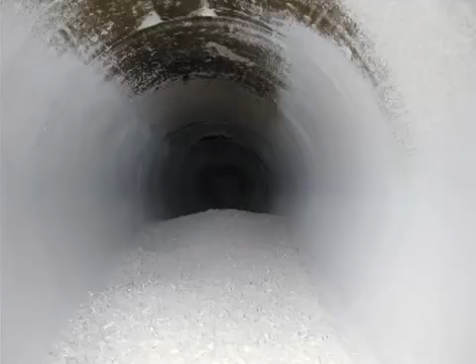Combustible dust fires and explosions continue to occur frequently, fueled by accumulations of combustible dust, which can gather over years in hidden places or in plain sight.

No company wants to see its facility blown up and destroyed and its employees killed, but they just don't understand what the hazard is. They don't realize that they have a hazard here until that one day when the explosion occurs, and it's a terrible tragedy for them. And they look back and say, if we'd only known.

When Tammy Miser got a phone call late one evening in 2003, she worried it would be about her brother, Sean Boone, who worked at an automotive parts factory. We usually didn't answer the phone that late, but we knew when it kept ringing that there was something wrong, so we answered it.

There had been an accident there before, so I knew. I knew if they were calling me, it was my brother.

Sean Boone was a mechanic at the Hayes Lemmerz plant in Huntington, Indiana. The company produced aluminum car wheels.

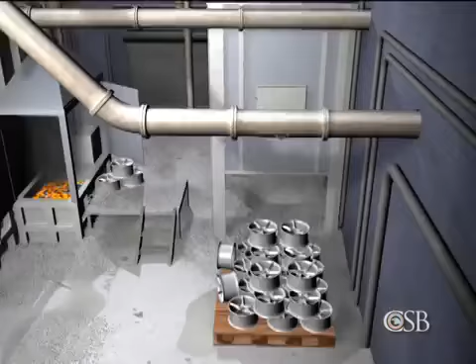The process of finishing the wheels left behind aluminum scraps, which were chopped into small pieces and sent to a furnace to be melted and reused.

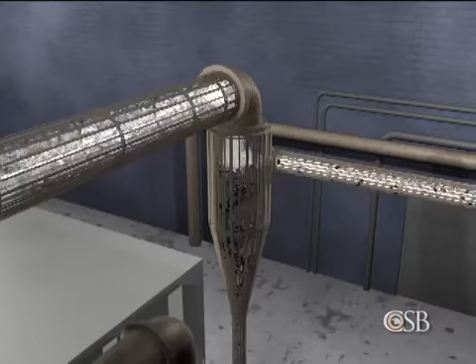Chopping, drying, and blowing the dry chips through the transfer piping created highly combustible aluminum dust, which flowed through ducting to a steel drop box outside the building, where large particles were trapped. The air then entered a dust collector, which removed finer aluminum particles.

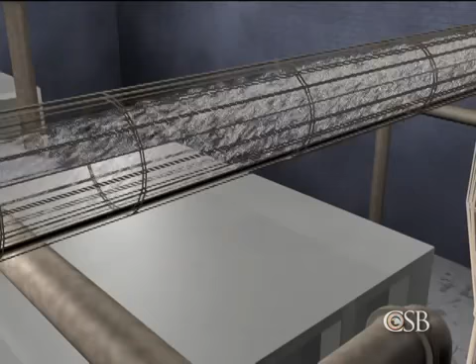Over time, aluminum dust accumulated inside ducts. In addition, there were leaks in the piping used to transfer aluminum chips, which caused dust to build up on surfaces throughout the furnace area.

Aluminum dust landed on beams, ledges, and equipment. In some places, the dust was several inches deep.

On the night of October 29th, about 10 minutes after workers started the aluminum chip melting process, aluminum dust inside the dust collector was suddenly ignited, perhaps by a metal ember or impact spark, resulting in a large explosion.

The blast propagated back through the duct into the steel drop box, blowing it apart. The fireball and pressure wave continued back through the duct system into the building, gaining intensity as the accumulated aluminum dust ignited.

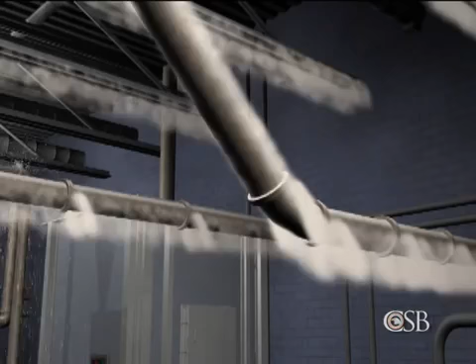The violent disturbance shook loose dust that had built up on external surfaces. At about 8:30 p.m., plant mechanic Sean Boone was one of several workers in the area of the furnace.

Without warning, a fireball erupted from the furnace, engulfing the area and igniting airborne dust in a second, larger explosion. The explosion blew a 50-foot wide hole through the roof of the building.

Co-workers found Sean Boone lying on the floor near the furnace, gravely injured. He was rushed to the hospital and put on life support.

And they told us that his internal organs were burnt, and they could take his arms, and they could take his legs, but he probably wouldn't make it, and it would just prolong it. So we went ahead and took him off.

Sean Boone was one of 14 dust explosion fatalities in 2003 alone.

Launching a comprehensive investigation into the hazard, the CSB held 2 public meetings, convening panels of experts and listening to extensive public comment. First, combustible dust is a real serious problem in all of general industry.

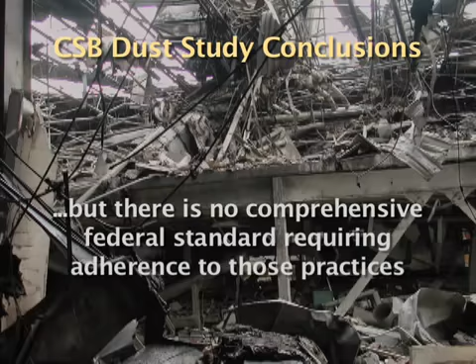The CSB report concluded that good engineering and safety practices to prevent dust explosions have existed for decades, but there is no comprehensive federal standard requiring adherence to those practices. And many companies are not taking effective actions to control dust hazards.

As a result, the board recommended increased regulation of dust hazards. The final report was approved at a public meeting in Washington in November 2006, and the report and recommendations are adopted.

We found in our study that the issue of combustible dust explosions is not focused on one particular industry. It happens right across all industries, including some where you perhaps wouldn't expect there to be an explosion. Industries at risk include food production, metal processing, wood products, chemical manufacturing, rubber and plastics, and coal-fired power plants.

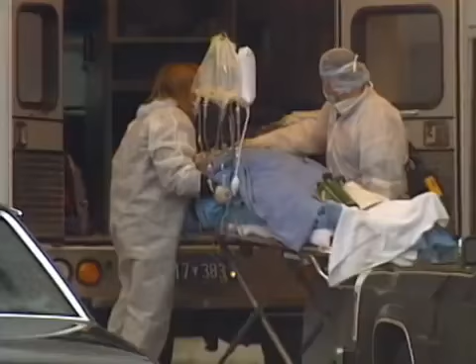The CSB study provides many examples of the continuing toll from dust explosions. Coal dust exploded in 1999 at the Ford River Rouge plant near Dearborn, Michigan. Six workers died and 36 were injured.

Resin dust exploded at the Jahn Foundry in Springfield, Massachusetts in 1999, killing 3 workers and injuring 9 others. Rubber dust exploded at Rouse Polymerics in Vicksburg, Mississippi in 2002, leaving 5 dead. A nylon fiber explosion destroyed Malden Mills in Methuen, Massachusetts in 1995.

Between 1980 and 2005, the CSB found at least 281 combustible dust fires and explosions that caused 119 deaths, 718 injuries, and major damage to industrial facilities.

Amy Beasley Spencer is a combustible dust expert at the National Fire Protection Association, or NFPA. Beyond the loss of life and the injuries, when you think about the economic impact of a dust explosion, you hear about plants being completely destroyed. There's loss of jobs. It's an economic impact on the entire community.

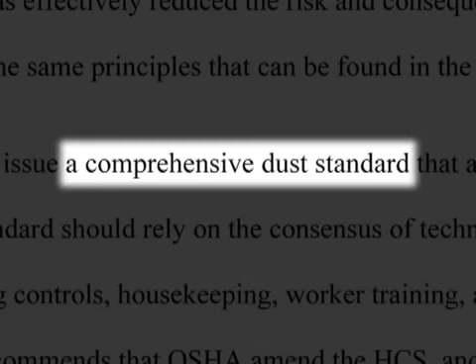The CSB report called on OSHA to establish a comprehensive regulatory standard designed to prevent dust explosions in general industry. The board said OSHA should base the new regulation on current NFPA standards. These codes address hazard assessment, engineering controls, housekeeping, building design, explosion protection, operating procedures, and worker training.

The NFPA codes and standards have been in existence since the early 1920s, and there are 7 codes and standards that deal directly with dust. It's a tragedy to have even one loss of life, because the technology is out there to prevent these dust explosions. In addition to the NFPA, the Center for Chemical Process Safety, as well as a leading insurance company, have developed recommended practices on controlling combustible dust.

The board also called for improved training of OSHA inspectors to recognize dust hazards. Interim CSB Executive William Wright explained the recommendation before the House Committee on Education and Labor in March 2008, citing 3 dust explosions the CSB had investigated in 2003. State OSHA officers had inspected all 3 facilities prior to the accidents, but the dust hazards were never recognized or cited.

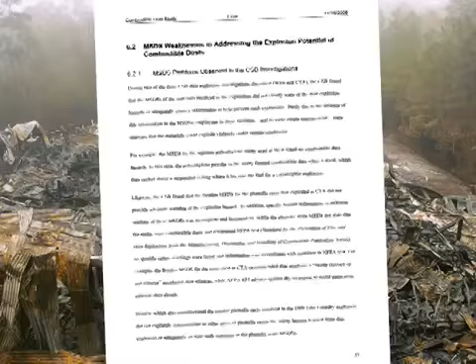Furthermore, the CSB determined that all 3 explosions could likely have been prevented if the facilities had implemented NFPA recommended practices. In addition, the board recommended that OSHA revise its hazard communication standard to ensure that material safety data sheets better communicate dust hazards to workers.

In response to the CSB's recommendations, in 2007 OSHA increased the enforcement of existing regulations through a new national emphasis program on combustible dust. Without a comprehensive standard for combustible dust, it's difficult for businesses to know which specific NFPA provisions or other requirements they may be subjected to.

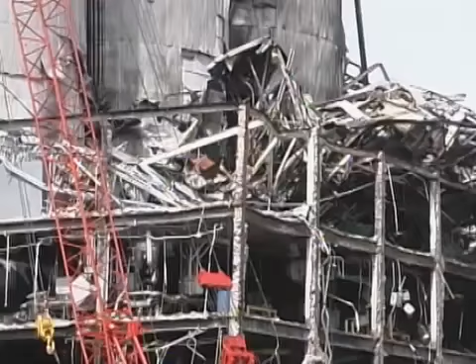The explosions tragically continue. The list includes the blast that crippled the Imperial Sugar Refinery outside Savannah, Georgia, in February 2008. Since 2005, about 70 additional dust explosions have been reported. In fact, the Imperial accident last month is the deadliest industrial dust explosion in the United States since 1980.

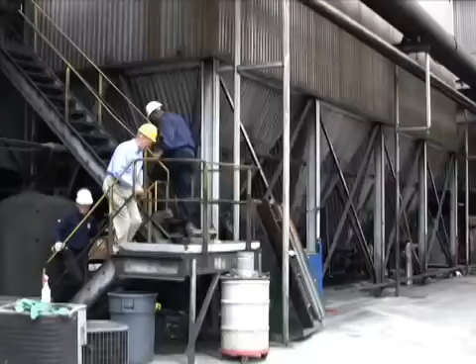CSB Chairman John Bresland: I toured the facility about 6 weeks after the explosion. The damage that was done there was catastrophic. As you walk around the facility, you think of the people who were working there that day, who were killed and severely injured. It was a difficult experience to walk around that facility. It was a very sobering experience.

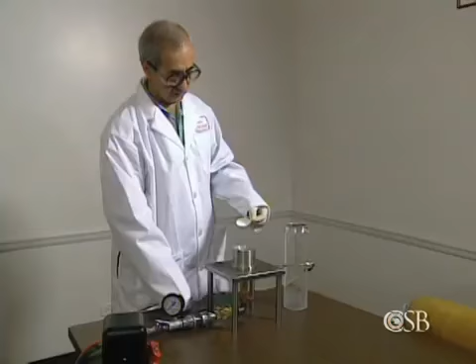What is so frustrating about dust explosions is that they're so preventable. And I believe that one of the reasons that dust explosions continue to occur may simply be a lack of understanding about the materials. Most solid organic materials will explode if the particles are small enough and they're dispersed in a sufficient concentration.

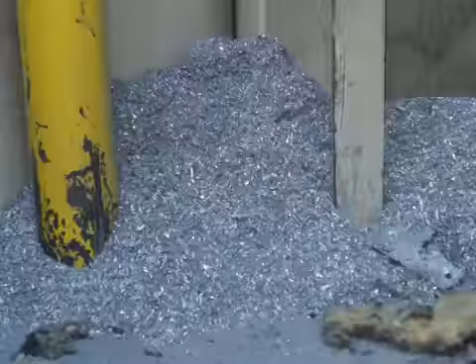Some of the materials that could form combustible dust, and there are lots of them, could include coal, sawdust, food products like sugar and flour, pharmaceuticals, many chemicals, and even many metals. Like all fires, a dust fire requires fuel, oxygen, and an ignition source. A dust explosion requires two additional elements: dispersion and confinement.

The CSB commissioned laboratory tests using a sample of fine polyethylene dust found by investigators in the rubble of a North Carolina factory. The dust is dispersed into a flame, creating a fireball.

When the dust is confined within a structure or a piece of equipment, a powerful explosion can occur and propagate, as this coal industry video demonstrates.

Dust may accumulate on surfaces and lie undisturbed for years. Then some initial fire or explosion, known as a primary event, shakes it loose and ignites it. It causes a pressure wave to go through the plant, and that dislodges all of the dust that is perhaps unknown, up on the rafters, on the beams, on the tops of equipment, and that serves as the fuel for the secondary explosions that move through the plant.

Most of the fatalities and the devastating injuries have been caused by these secondary dust explosions.

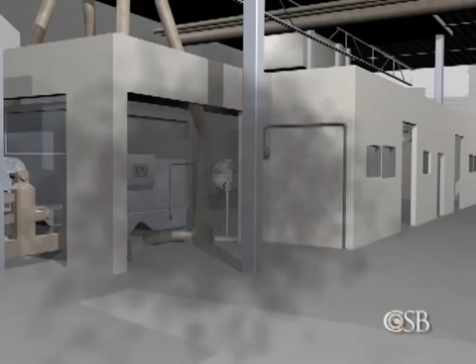According to the NFPA, a catastrophic explosion can occur from as little as 1/32 of an inch of accumulated dust, around the thickness of a dime, covering just 5% of a room's surface area.

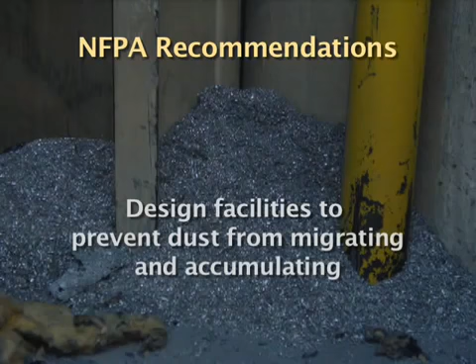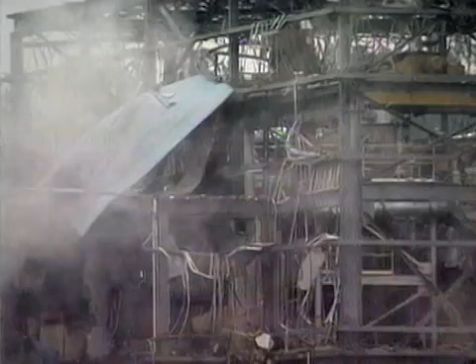The NFPA therefore recommends that companies control fugitive dust emissions, design facilities to prevent dust from migrating and accumulating, and perform rigorous housekeeping to remove any dust that does build up. The NFPA codes have been adopted either at the state level or in some cases at the local level, at the city level. But the problem is they're not enforced in any regular way.

A catastrophic dust explosion at the West Pharmaceutical plant in Kinston, North Carolina in 2003 reveals what can happen when companies do not properly assess the hazards from combustible powders and do not design their buildings and equipment appropriately.

West Pharmaceutical made small rubber medical products, such as syringe plungers and stoppers, at a large manufacturing facility with nearly 300 workers. In the process, large batches of rubber were compounded and rolled into long strips.

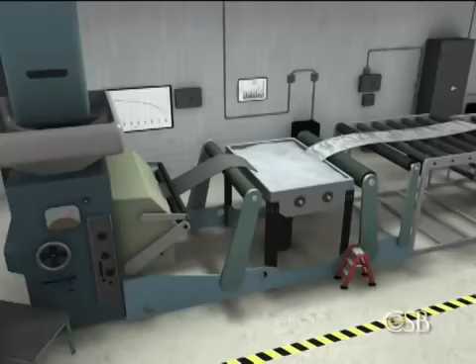To keep these strips from sticking together, they were dipped in a vat containing a whitish slurry of water and finely powdered polyethylene, a petroleum-based wax-like plastic. The coated rubber strips were then blown dry with fans and folded for later processing.

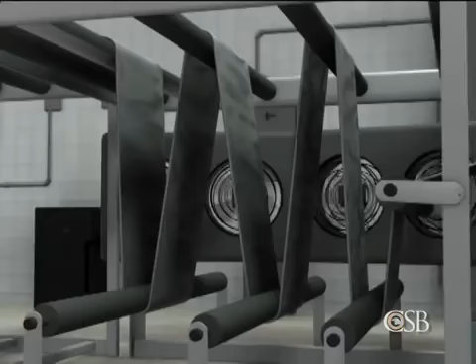As the rubber sheets dried, combustible polyethylene dust, which was not visible to workers but is colored white here for illustration, was blown into the air.

Over the years, the air conditioning system drew polyethylene dust into the hidden space above an acoustic tile ceiling that was suspended over the production area. There, the dust gradually built up to a thickness of up to 1/2 inch on ceiling tiles, beams, conduits, and light fixtures, just a few feet over the heads of unsuspecting workers.

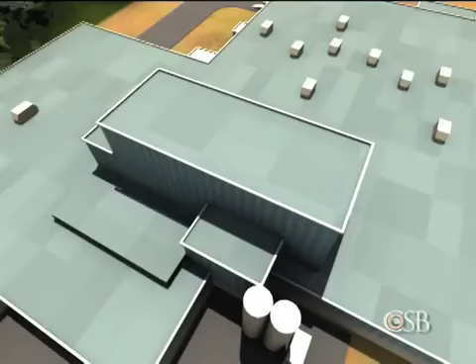January 29th began as a routine workday at the West plant. But at about 1:28 p.m., a small fire or explosion occurred somewhere near the production area.

It lofted the accumulated dust above the ceiling into a thick cloud, which then ignited in a much more violent secondary explosion.

Some employees described a sound like rolling thunder as the dust explosion spread throughout the space above the ceiling and ripped through the building. The accident at West Pharmaceutical Services took the lives of 6 employees and injured 38 others, including 2 firefighters.

The thing that set up the tragedy at West was the mere accumulation of hazardous dust above a ceiling.

The NFPA code says that any openings where dust could accumulate must be sealed. The solution would have been to either seal it or to not have a suspended ceiling.

Another cause of the West accident was that workers were not informed of the dust explosion hazard arising from the polyethylene slurry, a fact that should have been included on the material safety data sheet.

At West Pharmaceutical, the dust wasn't well recognized as a hazard because it was actually in a slurry form. So the actual processing of the slurry, the drying of it, created the dust, and the dust migrated above the suspended ceiling. Cleaning above the ceiling was overlooked in West's otherwise rigorous housekeeping program.

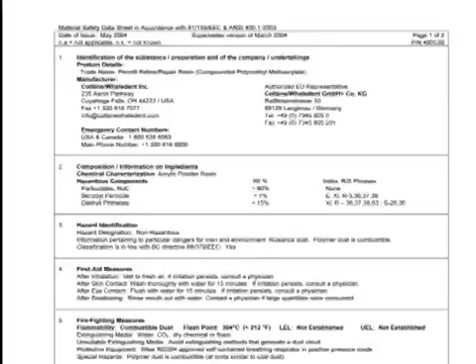The CSB found that the problem of inadequate MSDSs is widespread. Of 140 MSDSs for combustible powders, the CSB found that very few included adequate dust explosion warnings or referred readers to the appropriate NFPA standards. There needs to be better communication to workers on the issue of combustible dusts, and that should be done through improved information on material safety data sheets.

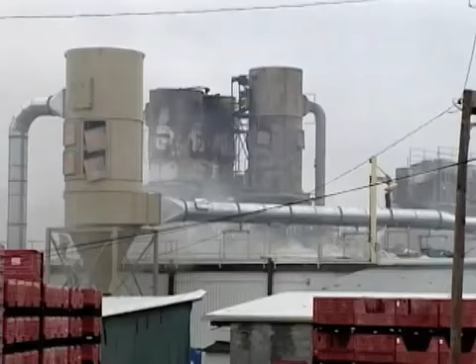Less than a month after the West Pharmaceutical accident, a fatal dust explosion crippled the CTA Acoustics plant in Corbin, Kentucky. The disaster at CTA, which claimed 7 lives, illustrates the critical importance of following NFPA recommended practices to control dust hazards.

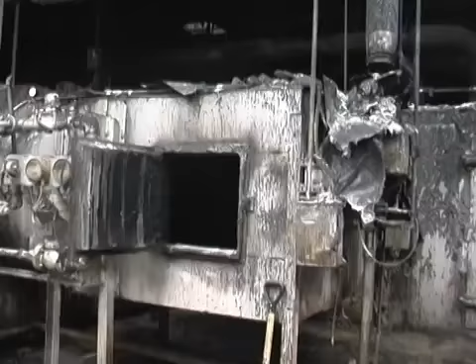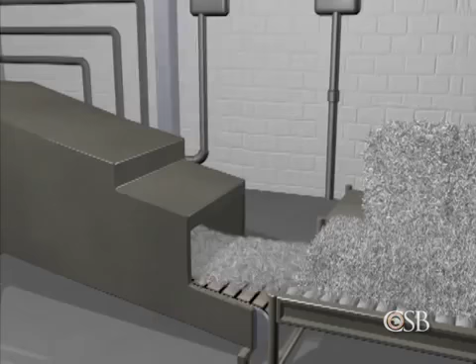The CTA facility, with more than 500 personnel, produced fiberglass acoustic insulation for automobiles. Covering 300,000 square feet, it had 5 production lines. At line 405, fiberglass was fed along a conveyor system and spread to create a web. Black phenolic resin powder was deposited onto the fiberglass. Hundreds of thousands of pounds of the combustible resin powder were used in the plant every month.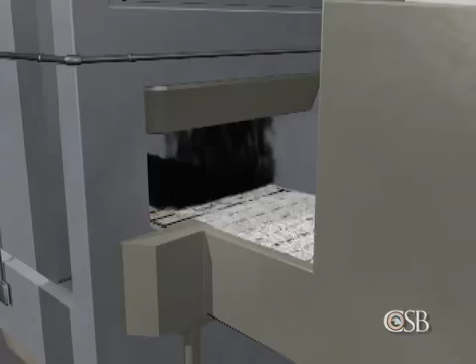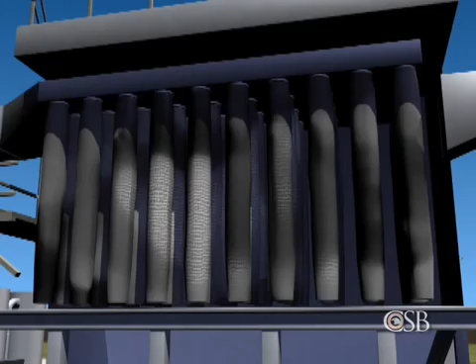Next, the mat former used air suction to spread the resin through the fiberglass. Excess powder and fibers were drawn up into a dust collector and rapidly accumulated on long cloth bags. After the mat former, a nylon facing was rolled onto the fiberglass before it entered a gas-heated curing oven.

Combustible resin accumulated in the oven, resulting in frequent small fires that were extinguished by workers. During each shift, the line was shut down for cleaning.

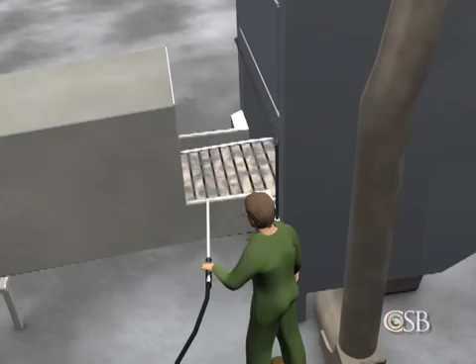On the roof, employees routinely used compressed air to dislodge dust that had built up in the ductwork, dumping the material into a large open box on the production floor. On the production line, workers also used compressed air to blow dust off equipment. They swept the production floor with brooms.

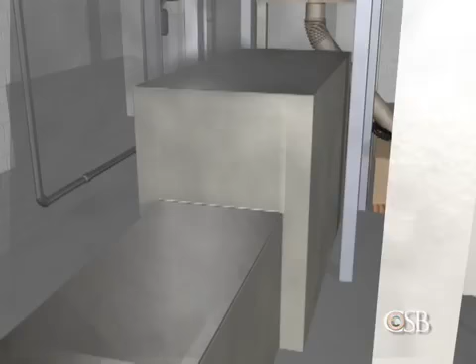These cleaning activities created dust clouds so dense that large fans were used to blow the dust away from the operators. This increased the dispersion of dust in the plant. The dust settled on horizontal surfaces throughout the entire production area.

Over years of operation, dust built up on top of pipes, electrical conduits, and other hard-to-clean elevated surfaces such as roof trusses. A pile of resin dust more than a foot deep had built up on top of the blend room due to periodic cleaning of clogged equipment.

On the morning of February 20th, 2003, production line 405 was shut down for routine cleaning. The oven was still on, with one of its doors left open to control the temperature because the oven thermostat had broken weeks earlier. CSB investigators later determined that most likely a small fire, unseen by workers, had started inside the oven, fueled by a buildup of combustible resin.

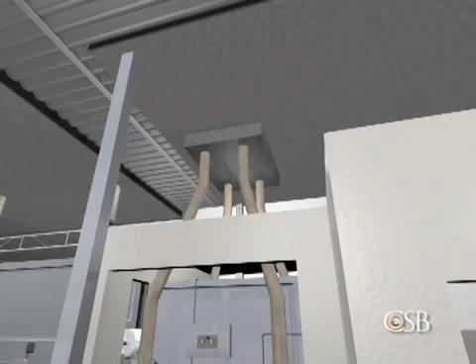During cleaning, workers had discovered that a transition duct leading from the mat former to the dust collector was clogged. They used a compressed air lance to dislodge the material back through cleanout doors into the production area. Together with other cleaning activities, this created a dense dust cloud around line 405. A wall fan blew the cloud toward the open oven.

The dust was ignited by the small fire inside. Flames erupted from the oven, igniting the larger dust cloud, which exploded. This was quickly followed by a second dust explosion at the other end of the production line.

4 employees nearby were injured. 1 later died from severe burns. The force of the 2 explosions shook the building and dispersed accumulated dust throughout the production area.

This airborne dust fueled a quickly moving fireball, spreading west along the roof trusses toward production line 403, which was also surrounded by dust. 4 workers in this area were fatally burned. The fireball continued past line 402, fatally injuring 2 more workers, and then to line 401, where a third explosion occurred nearly 300 feet from where the first blast was ignited. 3 workers in this area were severely burned.

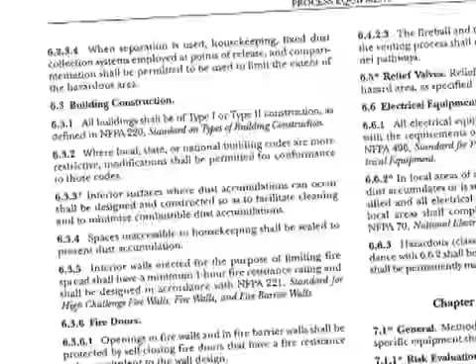NFPA recommends minimizing horizontal surfaces where dust can collect, but the CSB found that this was not done at CTA. At CTA Acoustics, there were many actions being completed that were prohibited in the NFPA codes and standards.

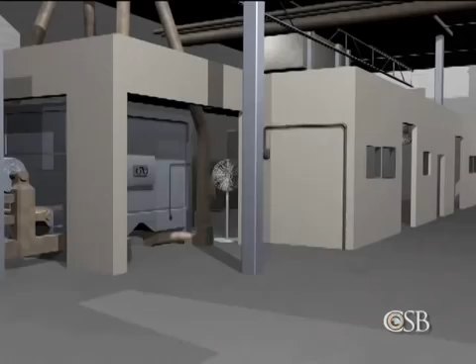For instance, if you're using compressed air, that can create more dust in the air to cause a larger fuel load for the actual explosion. CTA personnel also used brooms and fans to clean the production lines, which dispersed dust throughout the building. NFPA standards emphasize the use of safe cleaning methods, such as vacuuming with specialized equipment.

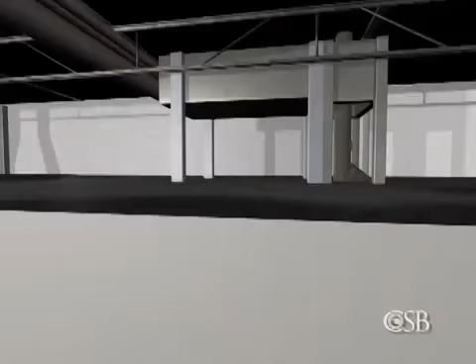In normal, routine daily housekeeping, workers address the working and walking surfaces in their production areas. They address their equipment, the places that they can see. But when it comes to preventing dust explosions, much more is needed. You have to clean in the out-of-the-way places, up near the rafters.

You also don't want to over-rely on housekeeping, because if you have housekeeping round the clock and you're still seeing layers of dust, you might want to look at your system to see why that dust is being produced in the first place. The CSB also found the material safety data sheets for the phenolic resin powder used at CTA did not adequately warn of the dust explosion hazard.

Kentucky State Fire Inspectors had not visited the facility since its construction in 1972. Insurance companies had inspected the plant on multiple occasions, but never identified the dust hazard.

Neither had state authorities. We found that Kentucky OSHA had, in fact, inspected this facility not long before the explosion, yet they had not uncovered the combustible dust hazard. We further learned that they had not received specific training to be able to detect this deadly hazard.

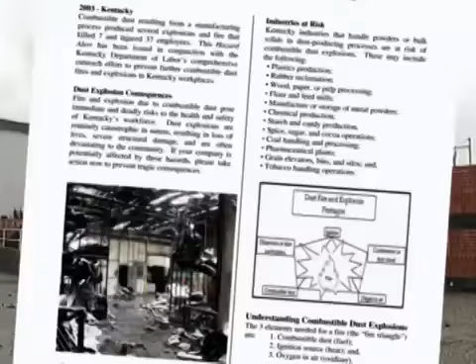Following the CSB investigation, Kentucky officials established a new program to inspect facilities with dust hazards and developed an educational bulletin on dust, which was distributed to thousands of facilities.

There's been a big explosion at one company.

Why do these accidents keep occurring is the age-old question. The knowledge is out there to make sure that no deaths occur due to dust explosions. I think the big problem with combustible dust is that we underestimate its hazards. We become complacent and we fail to take the necessary precautions.

But it's not going to happen in my plant. Because it never happened that way before. I mean, we've been operating for 40 years and never had a problem. That kind of logic is one that can guarantee you to get into trouble.

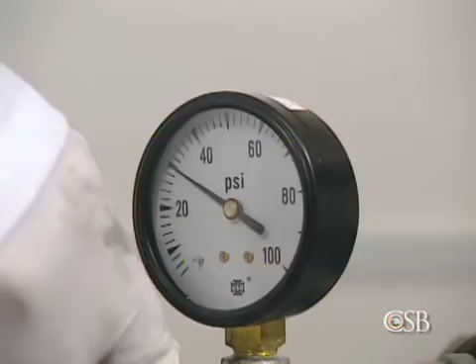Any material that they have in their process in a dust form should be tested to determine if it is a dust explosion potential or not.

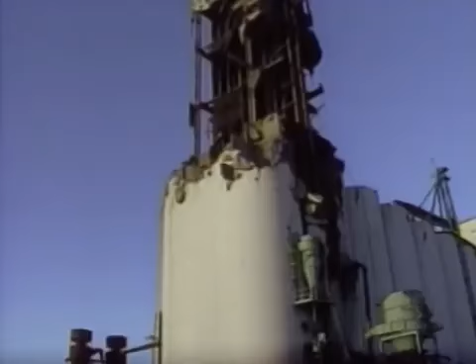In the 1970s and 80s, the U.S. experienced a series of grain dust explosions that killed many people. OSHA responded with new regulations in 1987 requiring preventive maintenance, worker training, and formal dust cleaning programs in grain handling facilities. A 2003 OSHA analysis concluded that the number of deaths from grain dust explosions had dropped dramatically.

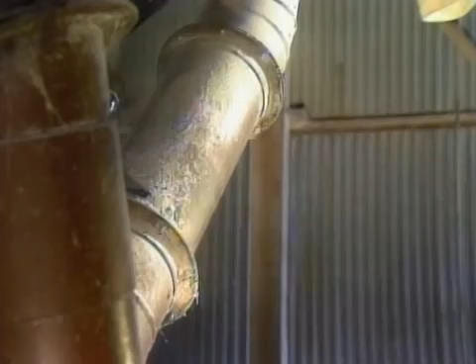OSHA has a specific standard for grain dust, and that's been a very successful standard, and it has significantly reduced the number of accidents involving grain dust. I believe if there were a national OSHA requirement dealing with dust explosions, that the incidents would be significantly decreased.

In April 2009, Secretary of Labor Hilda Solis announced plans for a comprehensive regulatory standard. Where workers are in danger, where mandatory regulations make sense, we will act and we will implement. And I'm announcing today that OSHA will begin the rulemaking on combustible dust.

What I feel that we need to do to prevent combustible dust explosions is threefold. We need education, we need industry to understand what the hazards are. We need regulation, we need a comprehensive combustible dust regulation, and we need enforcement of the regulation. And I feel if we do all three, we'll go a long way to preventing these terrible tragedies that we're seeing with combustible dust explosions.

The only way to keep my brother from dying in vain would be to make changes. And if there's not a change made, well, then it's going to happen again.

I hope that people who watch this video will take the lesson that they really need to do something to prevent combustible dust explosions. For more information on combustible dust, please visit csb.gov.